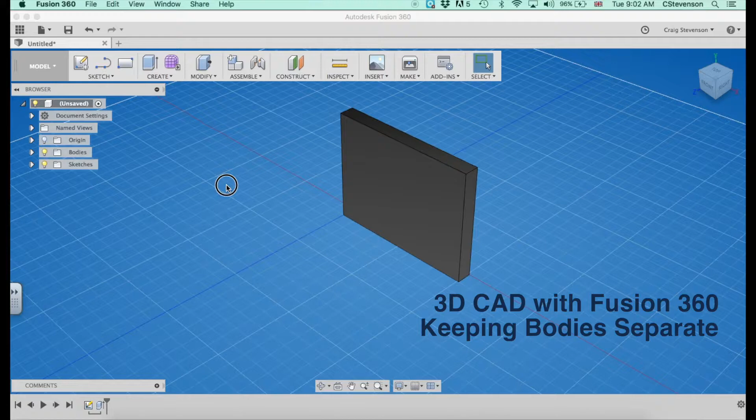Okay, usually when we present our information to show how things would be manufactured, we like to show exploded or assembly drawings because that can help you think a lot about manufacture. Now, when you're drawing in Fusion, you need to make sure you do something specifically when you're extruding extra parts from another part to make sure that those parts stay separate.

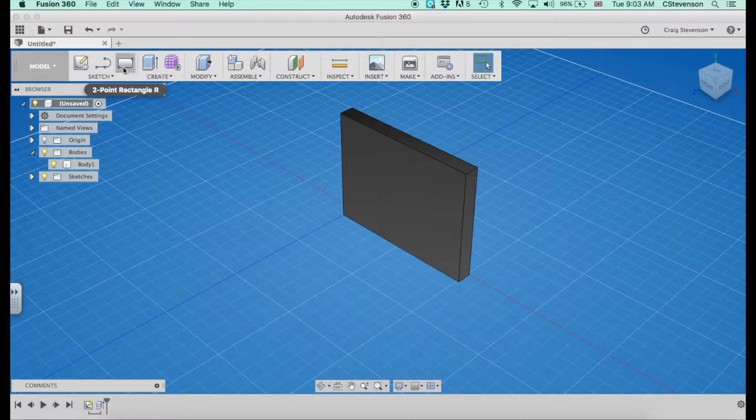Okay, if we look at my bodies here, if I open that up, I've got body one and I've got this part here. Now, if I want to draw another piece connected to that, so let's say I was going to make a four-sided box, for example, I'm going to draw another rectangle on the surface of that. I'm going to start here. I know my material is 10 millimeters, so I'm going to put 10 into there, and obviously this needs to be the same size as the piece I'm drawing on because I want it to extend from that.

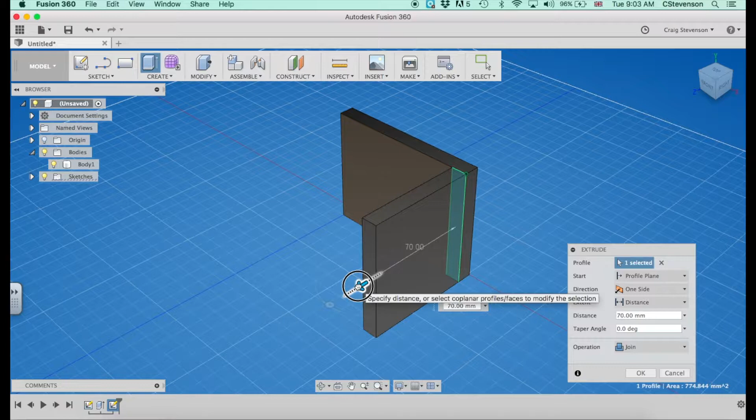I'm going to stop that sketch. Now I'm going to extrude that shape out to a specified length. Let's say it's 70. Now, what Fusion automatically thinks you want to do if you draw something from something else is you want to join it. Now we don't want that. We want it to be a new body. That keeps it as a separate piece.

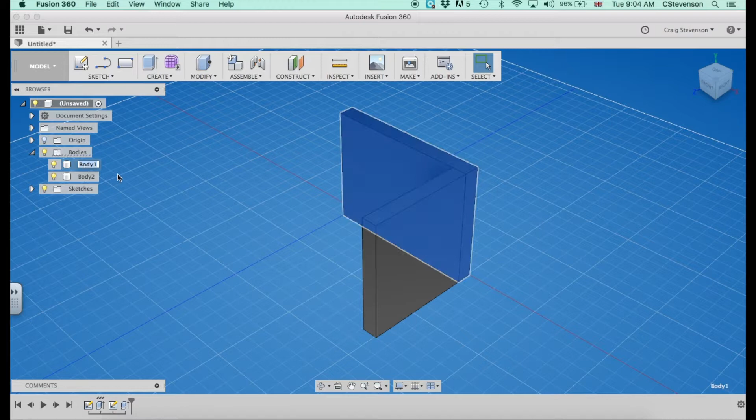And if I click on new body, a good way to double check that you've done the right thing is when you click OK, you should see a second body come up here like that. Alright? Now, it's good practice to maybe change the names of this to side 1 and side 2 and things like that to make it nice and easy for you.

Now, if I go back into that feature there, if I had left it at join, if I click OK, it now becomes one thing and there's only one body here. But I don't want that. So if you make a mistake and you've joined it, you go, oh no, that's one body, you can go back down to your timeline.

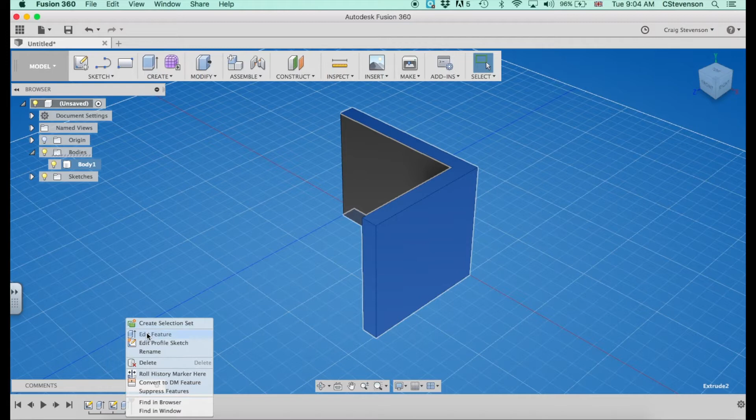If you hover over one of these extrudes, there's the first extrude I made, there's the second, I can right click that and go to edit feature and I can change that to a new body, OK that, and then it comes back to being a new body here. You can do that at any point during your drawing.

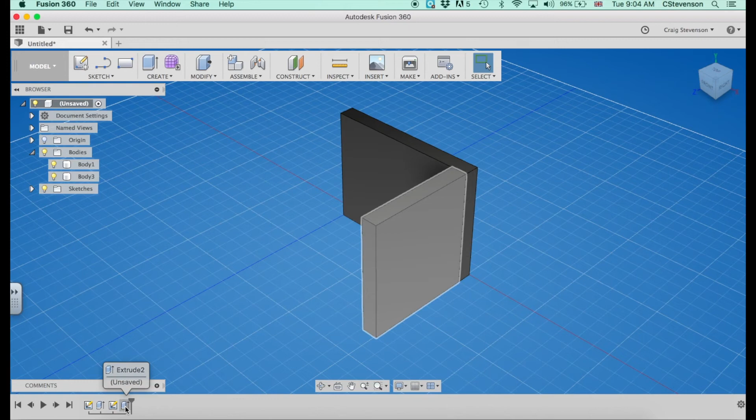If your timeline is all the way along here and it's massive and you realize that you didn't do that for one of your parts, go over your timeline, and if you hover over the little extrude icon here, you'll see what part that corresponds to. So you can find the right one, right click it, edit feature, and you can change it back to new body, and then that should help you separate your pieces out if you forgot to do that earlier on.